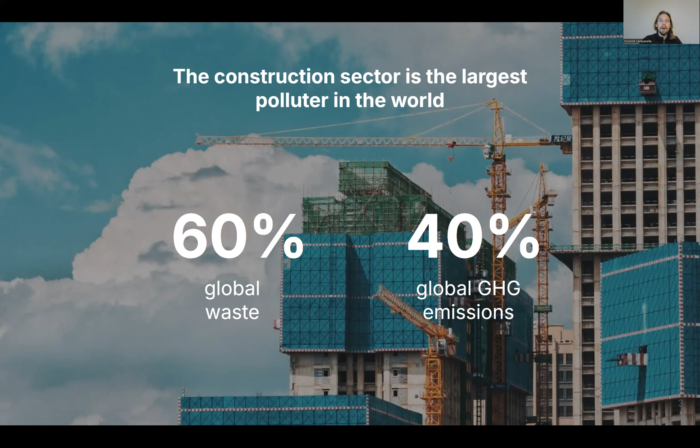Now, why is that so? The answer is quite easy also here, because we are following the so-called take, make, waste model. So we take valuable resources out of our earth, we produce them, we put them into buildings, and sometimes after just a couple of years, especially in the interior, we are taking these really valuable materials in a really good quality, and what are we doing with them? We are throwing them away.

A lot of them can be actually reused, but looking at it right now, only 1% of all materials are reused. So most of it is going into either landfilling or getting downcycled. And this is, of course, from an ecological standpoint, not really good. However, also from an economical standpoint, because we talk about really valuable materials, and we're taking these valuable materials and throwing them away. So there's a lot of economical value behind, which can be generated if we think in circles and not anymore in this linear model.

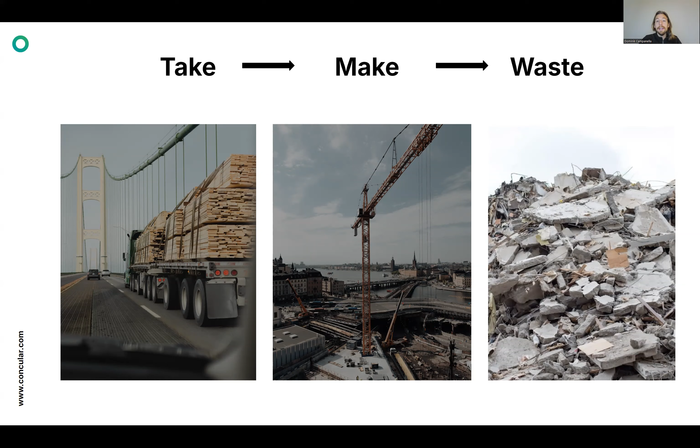So you can really say the climate crisis is decided on the construction side, and this is something more and more countries are realizing. So there are different measures they're doing. One measure I would like to introduce, it's not in Germany, but in other countries like Denmark and France, is so-called CO2 limits. These are really good because basically what these countries are saying is that you can still build whatever you want with whatever material you want.

However, you are only able to build if you are not above a certain threshold of CO2. In Denmark, it would be 12 kilos CO2 per square meter per year, and a building in Denmark would be used for 50 years on average. So you only get a building permission if in your planning you can show that you're below this limit. With wood it would be much easier to build than with concrete, but you can still build with concrete, you just have to think a bit more about the architecture.

Now, if you're reusing materials, these reused materials would count as 0 kilo CO2, because the savings of reusing materials is like 95 to almost 100% of CO2.

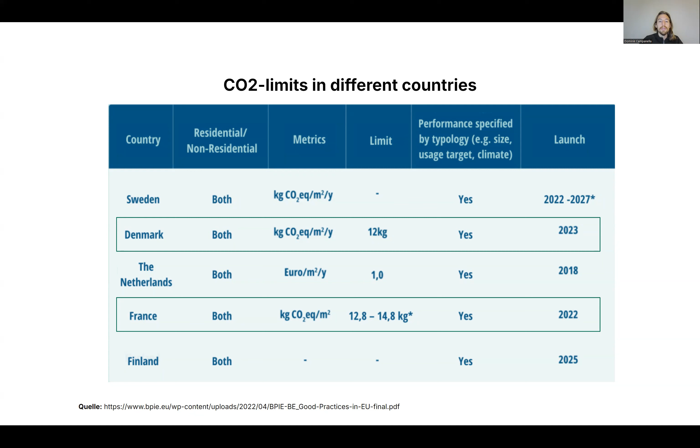Now, what they also did here is they start at 12 kilo, but every 2 years they decrease the CO2 limit. In 2023 they introduced it at 12, next year it should go to 10.5 kilo and so on. This is a really smart way because it's going down gradually, so the industry and everyone can adapt to it.

However, every year before they decrease the CO2 limit, they have a discussion, and this discussion was created this year. So as said, the plan was to decrease to 10.5, but what they did was calculate how much CO2 budget do we have to reach the 1.5 degree aim, the climate goal, and how many buildings do we want to build in that time.

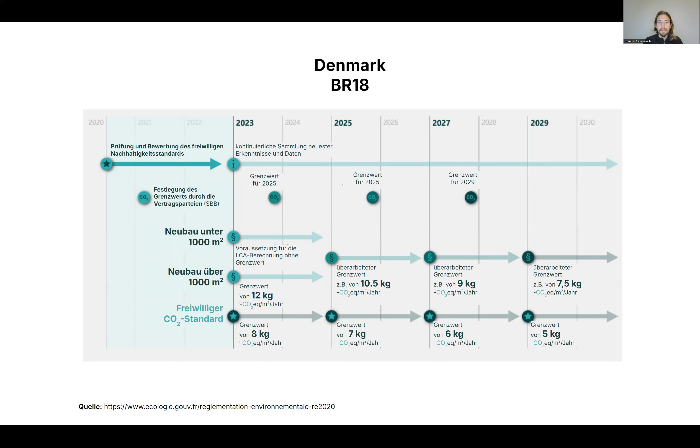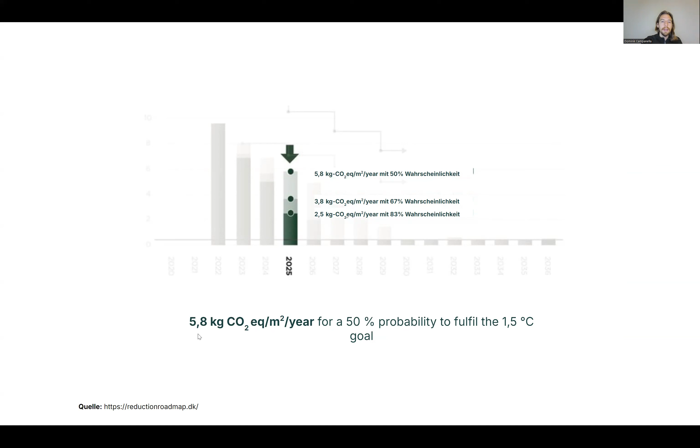And then they basically calculated the amount of CO2 which is still available, divided by the amount of square meters to build. And the conclusion was, if they want to reach with 50% probability - which is not even that high - the 1.5 degree goal, they'd have to reduce to 5.8. There was a lot of discussion, I mean, it's politics, and in the end it was agreed to lower the limit to 7.1 instead of 10.5.

This is already lower than what was intended for 2029, meaning this curve is much steeper, meaning it's much faster that you have to adapt to this new way of building CO2 reduced buildings.

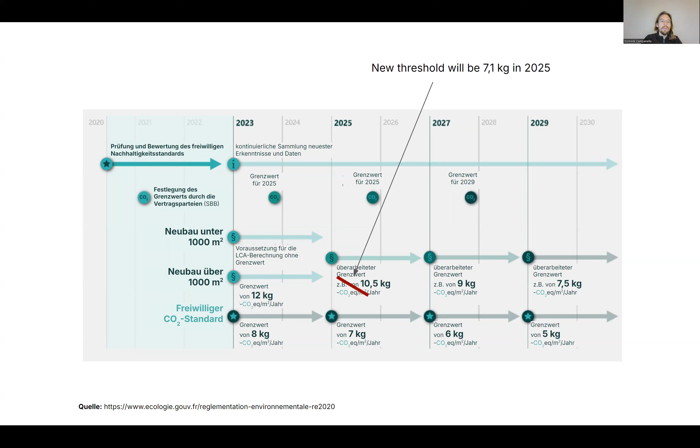It's also quite interesting why they're doing that. In Germany, this is not introduced right now, but there's a CO2 clock, meaning in 3 years all the CO2 budget is basically gone to reach the 1.5 degree aim. Germany already announced that they will also introduce that, so it's not a matter of if they want to introduce it, but when. And when they introduce it, it will be much steeper because we have far less time left.

I also asked the people in Denmark why they are doing these regulations, and they said it's quite easy: 40 years ago there was the same discussion about energy efficiency. What they did then was also have really good regulation, and the industry adapted to it. In that time, companies arose like Rockwool, Velux - these are really big manufacturers now of construction materials - and they were really successful in the market because they had the best products adapted to all the regulations.

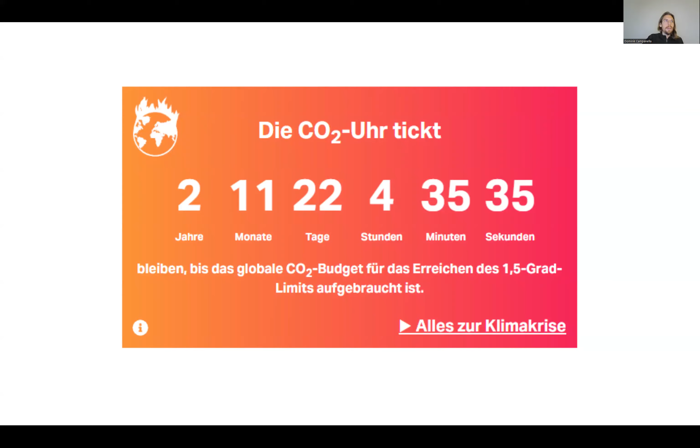Now Denmark is saying the same will happen with resource efficiency. This is why we put the regulation here now, so our industry can adapt to it, and our industry will export products all over the world. And this is right now happening. So sustainable construction, circular construction is a competitive advantage - it can create a whole new industry for a country, which is then thriving in terms of economic value. It's quite interesting because some countries see sustainability as a burden, while others see it as something good for the economy, because they will export all the materials. So this is something I think we should look at.

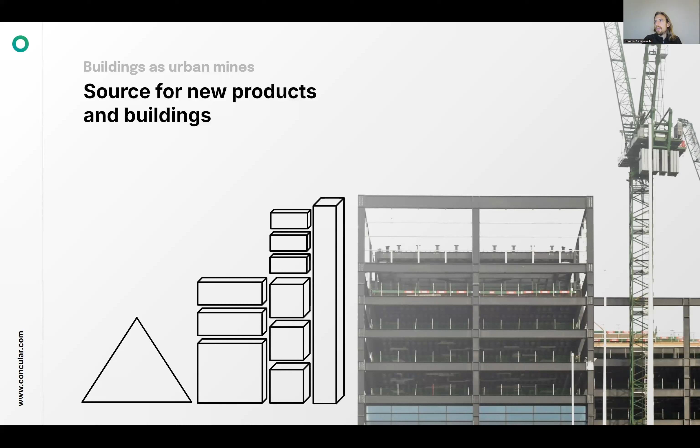So basically what we have to do, because reused materials is 0 kilo CO2, we have to look at buildings which are already there as mines, as a source for new products, as a source for new buildings. And we started already 12 years ago. One of our co-founders, Mark, he is an architect for more than 35 years.

He was on construction sites every day. On one site, they took out materials and landfilled them. On the other side, they took new materials, the same materials but new, and put them into buildings. He said this is nonsense, that on one side you trash materials and on the other side you use the same materials in a new way.

So that's why we created the marketplace, saying we have to connect the demand and supply of these materials, we have to match it. And this is what we created: Restado. It's now the largest marketplace in Europe.

What we discovered is that we can especially reach smaller businesses and private people. That's great, but if you look at where the big CO2 impact, the big economic and ecological effect is, it's the large construction projects, the professional actors. And they do not use Restado. Why?

So we asked them, why are you not reusing materials, why are you not using Restado? They said the answer was: because we need a certain amount of materials at a certain location, at a certain time, in a certain quality, with a warranty. And at a marketplace, like a classified ads marketplace, you cannot get this.

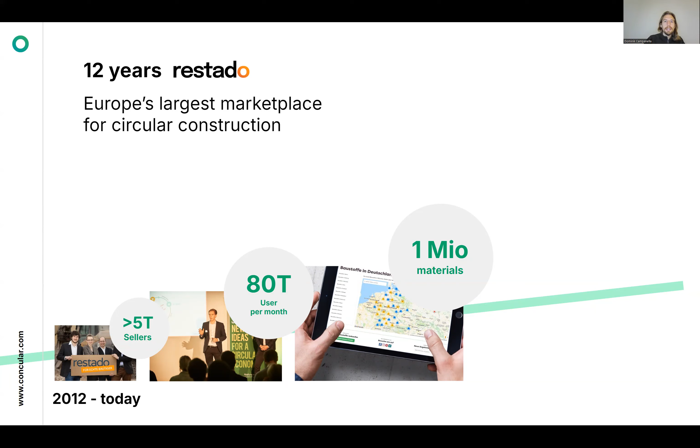So we wanted to make that possible, and we said okay, we have to make a new company that looks at all the process before and after matching these materials. This is why we created Concular, which is only for professional actors, only for large construction projects, and is able to fulfill all these requirements.

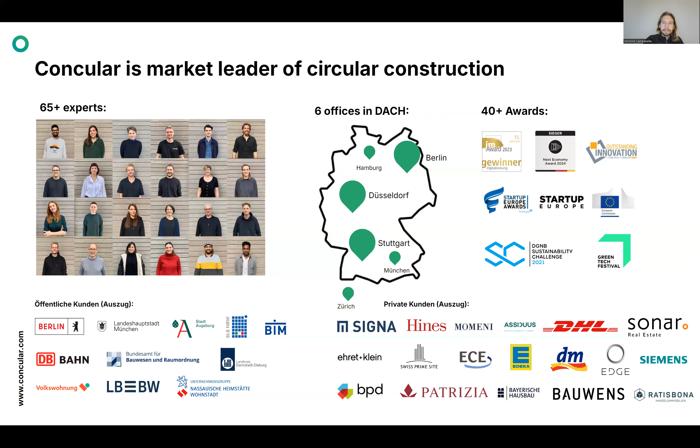We are right now around 65 people all around Germany, Austria, Switzerland. We work with large clients, public and private. We have a lot of partners, and we're trying to partner a lot with manufacturers, architecture offices, and so on.

We say it needs actually three steps: we have to digitize, we have to analyze, and we have to optimize.

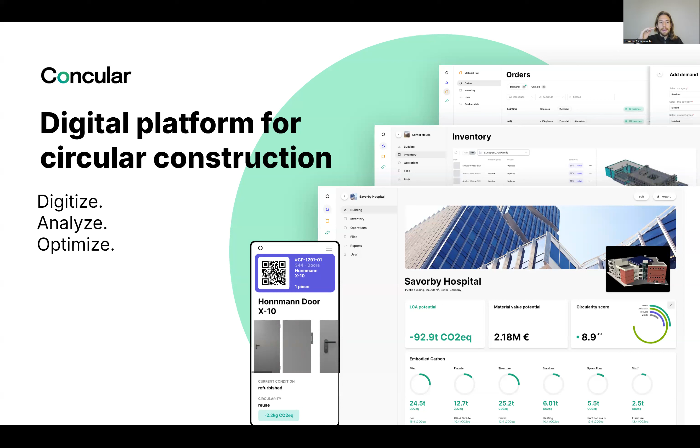With digitization, the big challenge right now for new buildings is that we don't even digitally document what's in a building. If you build a new building right now, in most cases after one year no one knows anymore what's in it. If you don't know what's in a building, you're not able to reuse the materials, because when deconstruction happens, the deconstruction company normally has just 2-3 weeks to get rid of everything. That's too little time to really reuse materials.

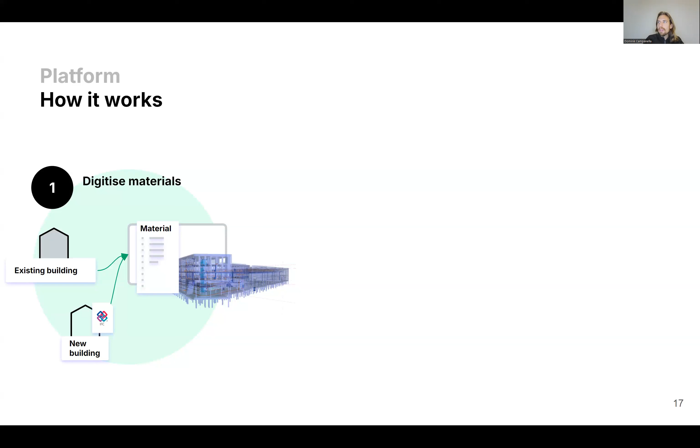So we have to digitize new and existing buildings so we know what's in them, and when we know what's in a building, we're able to reuse these materials. Then we're able to say how much CO2 is in a building, or what makes sense to reuse.

And then, when deconstruction happens, we're able to sell these materials back to manufacturers or into new buildings. Starting with new materials for new buildings, there's a concept called the building resource passport. Basically it's a passport for every building in which all the materials are digitized.

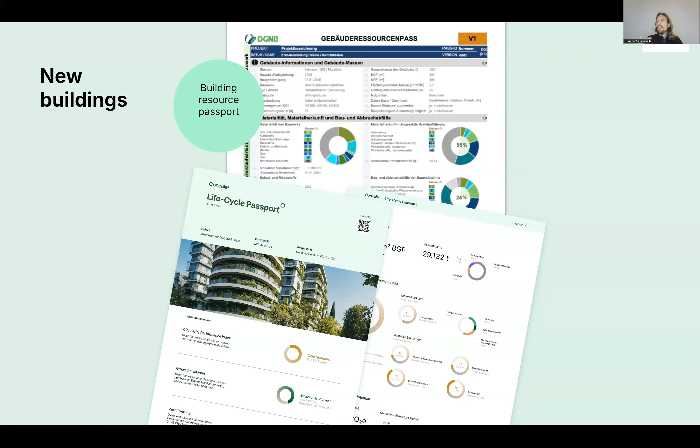We already have this in Germany through a certification system called DGNB, the German Sustainable Building Council, and also through the government, which will introduce it next year as required for every new building created in Germany. That will help the new buildings being built, but those buildings will only be deconstructed in 40 years or later, so it won't have a direct impact right now, but it's good for the future.

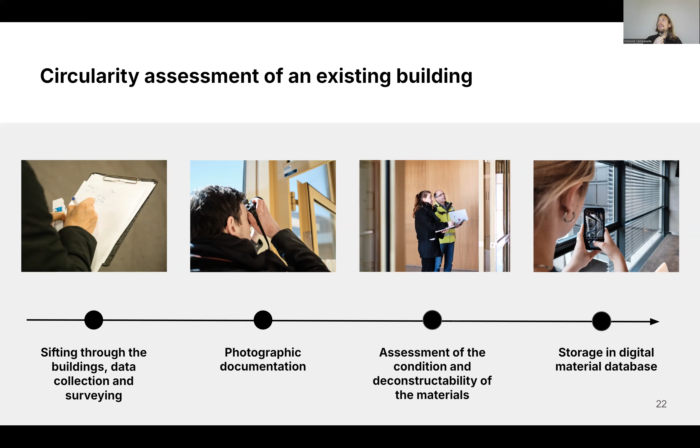So you go into a building with our software, and you can really easily and quickly capture all the materials on your phone.

You can install it on your phone, then you get all the materials digitally. You can also use something like a 3D scan sensor, which captures everything in a building or room in 1 or 2 minutes. Then you can use AI or computer vision algorithms that identify things like windows and doors. It's really fast.

This is great, and we did it for more than 450 buildings in Germany. But in the same time, 20,000 buildings were deconstructed. So we thought, okay, this is now a great technology, but we want every building in Germany that's getting deconstructed to look at what materials are in it and if we can reuse these materials.

The German market is very special because Germans love to follow rules. Rules are everything in Germany. What we discovered is if you build a building in Germany, you need a lot of permissions, sometimes 2-3 years to get them. It's an amazing system. But when you deconstruct a building, you don't need any permission at all. You can just tear it down.

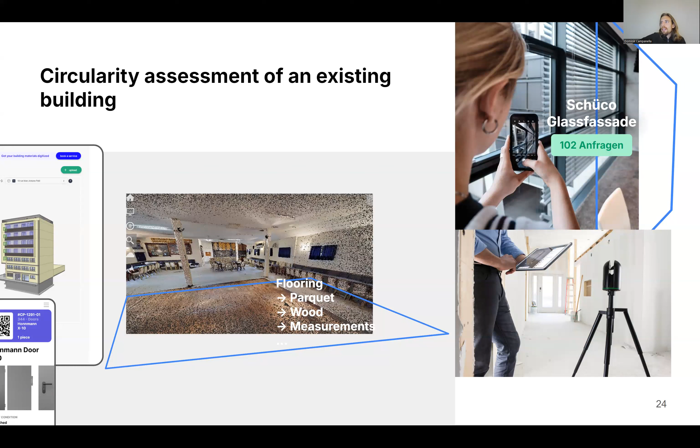This is amazing, that on one side we have this whole regulated market, and on the other side we don't have any regulation at all. So we thought, how can we make that now required? We thought, okay, if Germans really like regulation, then let's create our own regulation and create a standard. So this is what we did.

DIN is the standardization committee of Germany. So we created a DIN standard on how to do so-called pre-demolition audits - basically how to assess materials before deconstruction and how they can be reused. We did it with 30 leading companies in Germany, including all the big construction companies, universities, and so on. And we created this as a standard.

This is really amazing because we published that in September last year, in German and English. You can just search for DIN SPEC 91484, download it in English, and use it for yourself. It's free, everyone can use it - it's open source. And the interesting part is, because we introduced it in English, it was already adopted in Denmark, Switzerland, and France.

Meaning a German standard is not adopted in Germany, but it's adopted in other countries, which is quite funny. But what's also interesting is that now all public buildings in Germany are following the standard. We introduced it 1 year ago, and it's already applied to a lot of public buildings, and it will be getting required next year. Meaning we can have a really big impact if we combine the digital part with regulation and standards. It's a really big impact, and this is what we're doing more and more right now.

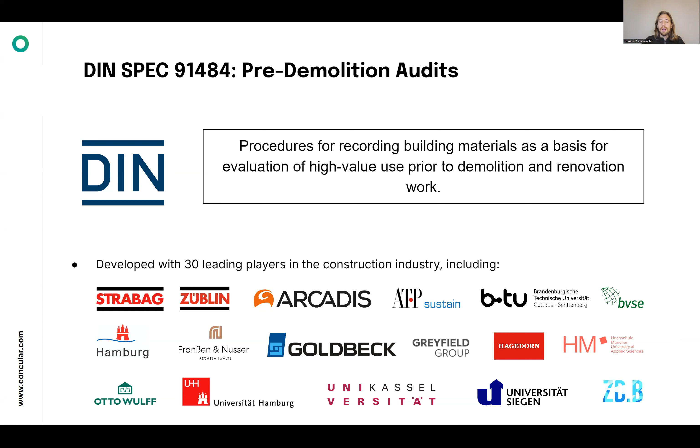We're creating now a new standard also for how a deconstruction concept could look. Now we have everything - let's say we went into a building, digitized everything, and then we can do a lot of interesting analysis. I'll give you one example.

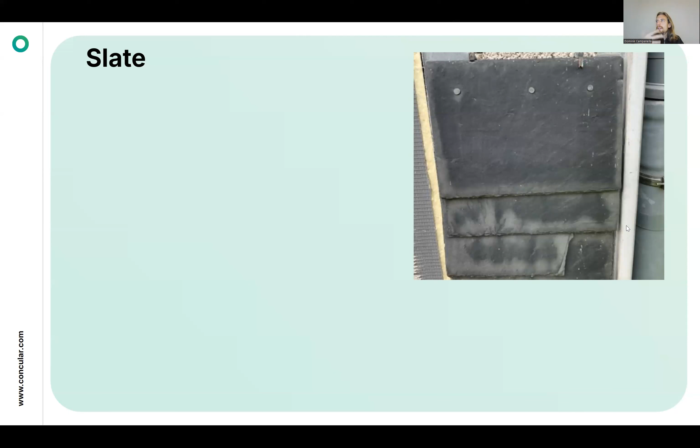We had one building in Germany, we digitized everything, and these are slates - we have 800 square meters of these slates. The idea is to tear down the building and build a new one, again with slates. So what we calculated is how much it costs to deconstruct these slates in Germany - almost 13,000 euros. And how much does it cost to buy new slates?

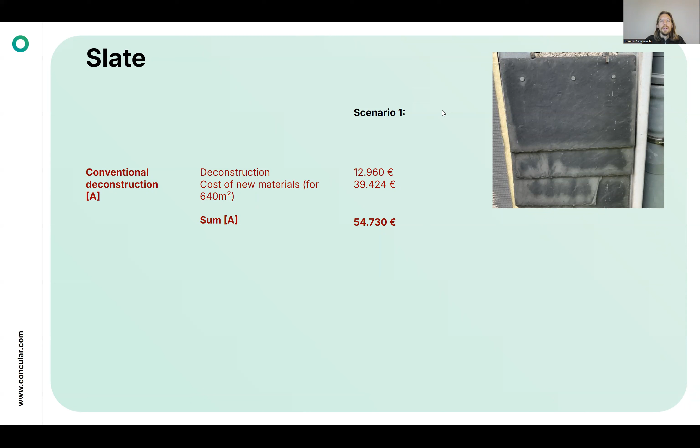We did not use 800 square meters because you can see there's some damage, so we said 640 square meters, around 80% of it. It costs almost 55,000 euros to get rid of it and buy new ones. Then we analyzed how much it would cost to take off these slates without destroying them - almost double the price - but also how much it costs to refurbish them and transport them.

And so in total, it's 21,000 euros. So it's 33,000 euros less if you reuse the materials than to get rid of them and buy new ones. Meaning, reusing in the same project, you can save a lot of money by reusing materials.

But you would save also a lot of money if you do that and then sell these materials, because if you buy new ones, you pay around 40,000 euros. Now you can sell maybe the reclaimed ones for around 30,000 euros, which makes again also a profit of still like 10,000 euros. Meaning like in every scenario, you would get money out of reusing these materials instead of having new materials.

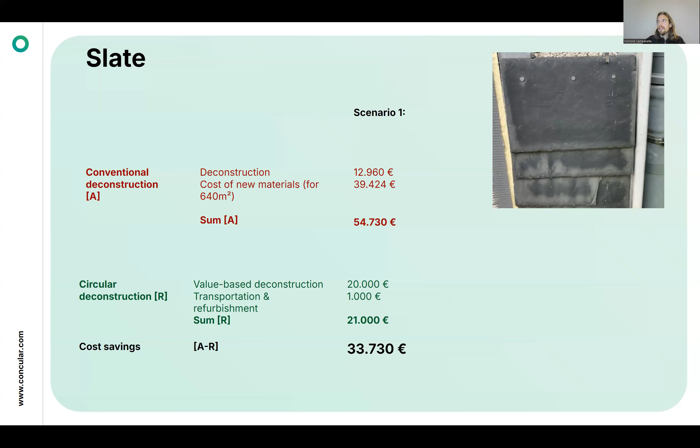Meaning like if you have a building, an existing building, it's much more worth because you can sell these materials. So it's really a lot of money in some buildings which you can make by selling the materials.

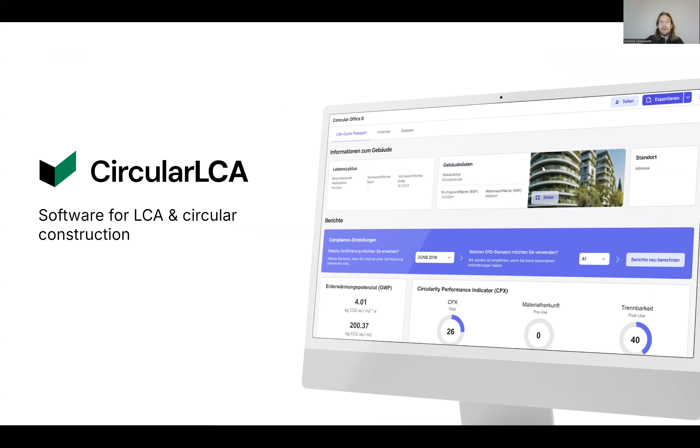And to enable that, we created a software called Circular LCA, where you can do like an LCA, so life cycle assessment, and you can measure all the stuff. So I just told you like you can make money with it.

And so what you can do with our software is you can actually calculate how much money can you make in selling these materials, because before you paid for the landfilling, now you can make money for selling them. So you can make out of the cost block a value block, and we can give you that number. And normally you can also use the number to sell your building for a higher price or put it on your balance sheet for a higher price.

You can also calculate how circular is your building. We calculated with 5 different factors. So like, where's the material coming from? Is it easily deconstructible? Is it easily separable? And then can it be reused or recycled?

And then you get a score between 0 and 100. And then it tells you how circular the building is. And you can do a lot of other stuff. Like you can even say what is the weight of my building? And which materials have the most CO2 and so on. So you can do a lot of analysis.

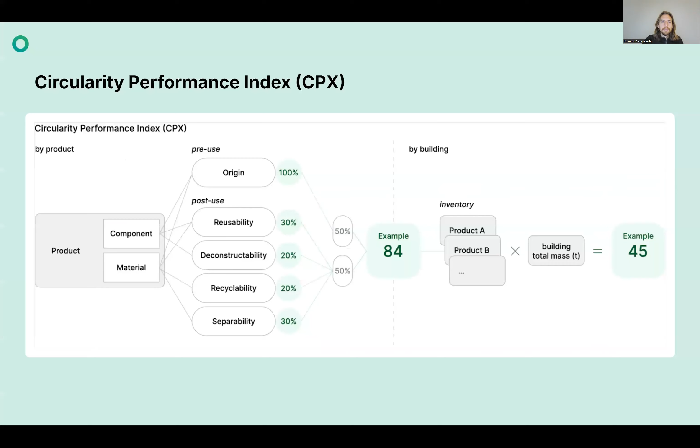And you can also do variant comparison. I think this is also quite interesting. For example, if you're building a new building, you can create different variants and say, like, in this one building, I put new materials, in the other building, I put reclaimed materials, and so on. And then you can compare it, how much CO2 it has, how much is my building worth, and so on.

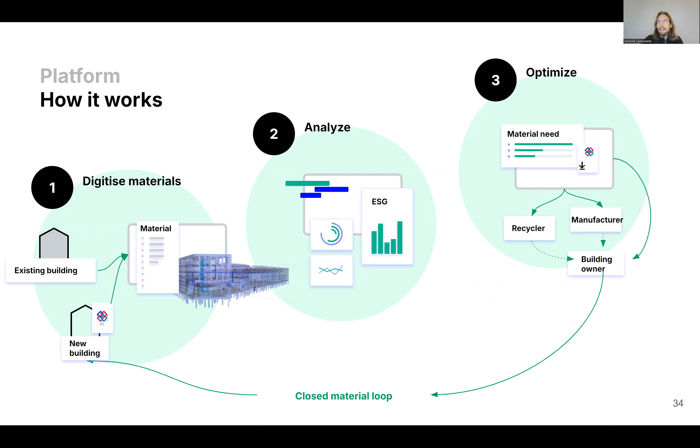Now, if you did all of that, this analysis, and then there's the deconstruction, you are able to reuse these materials.

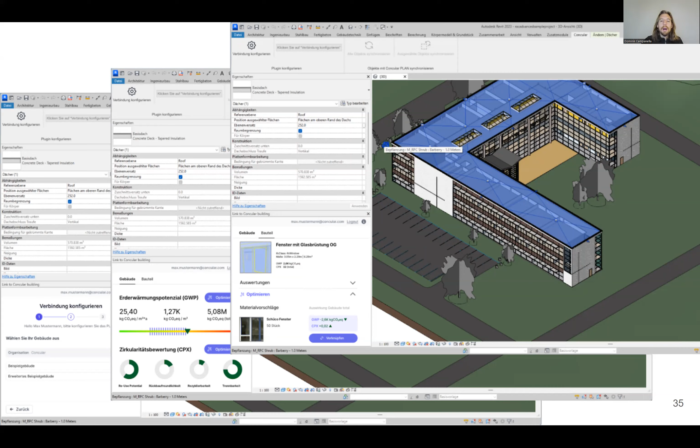I think this is very important to understand: we don't want to create a complete new process. We want to integrate into the existing process, because we realized it doesn't make sense to create complete new processes, since a lot of people have to adapt to it and it takes a lot of time, but we don't have any time anymore. So we have to kind of hijack the current process and put our software and everything in, to make it very fast.

Also, some materials we cannot reuse in Germany, for example windows. In Germany we have really strict regulation on energy efficiency and so on. So we also partner with initiatives like ReThink, a Swiss association. Basically what they do is take all these windows which are not getting reused in Germany and send them to Ukraine. Of course, we don't sell them to this association, we give it for free. They take it, they transport it, and then it goes into Ukraine. I think this is a really good thing, to support Ukraine with materials as much as possible, because there's a high scarcity as far as I understand.

Very important is also the infrastructure for reusing materials, because very often you have a deconstruction project, you get out the materials, but you don't have a new project, or the new project is starting maybe 2, 3, 4 months later. So you need storage facilities in between.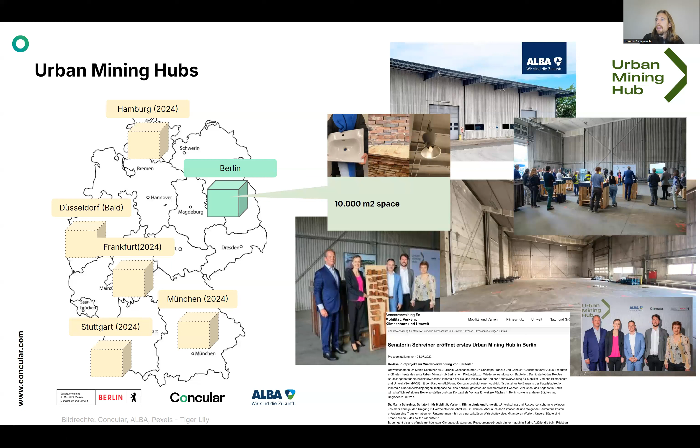This is why we created the concept of so-called urban mining hubs. Urban mining hubs are basically storage facilities where these materials can be stored, refurbished, and then put into the new building. We created our first urban mining hub last year in Berlin, thanks also to the city of Berlin and Alba, and it's really working well. Thousands of materials were already stored there, and every day there's trucks going in and out. We will open still this year a lot of these urban mining hubs in Germany. I think this is a really amazing thing.

Another really important part in Germany, and maybe it's the same in Ukraine, is about insurance. If people are buying reclaimed material, they often think it has a lower quality, and they think if something gets damaged they have a problem. This is why we created, with the largest insurance company in Germany, VHV Versicherung, an insurance specifically for reclaimed construction materials. So you can insure any damage on reclaimed construction material, meaning this is not something a new material has - this is only for reclaimed materials. In the end, a reclaimed material has an even better insurance coverage than a new material. So it's cheaper, it's faster to get, it has much less CO2, and it has a better insurance coverage, which is a lot of arguments to use reclaimed materials instead of new materials.

What's also quite interesting is, when we created this insurance with the insurance company, we had to assess the risk of damage for the materials. The insurance company showed us when a damage normally happens in such a material. Normally it happens in the first year after production, because there might be production issues, or in the last year of the insurance, because people discover they still have insurance and it will expire soon. So what we discovered is if you reuse a material, such as a brick, you don't have this issue of damage in the first year, because the brick was already in the building for 50, 60 years. There is no production issue anymore because it would have shown way before, meaning a reclaimed material has far less risk of getting damaged than a new material. So because people think reclaimed materials are lower quality, this is not true - they are even better quality than new material. This is what we discovered.

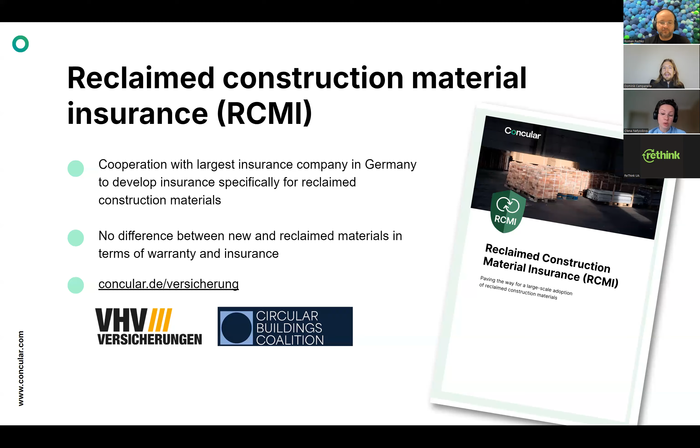With that, we already had more than 450 successful projects. And what I want is to show you now some of these projects. But I quickly have to drink something.

So starting with this is an industry hall in Berlin. In this industry hall, PV modules were created, so like photovoltaic. And that factory was closed down. And then we were told that we should sell the whole industry hall.

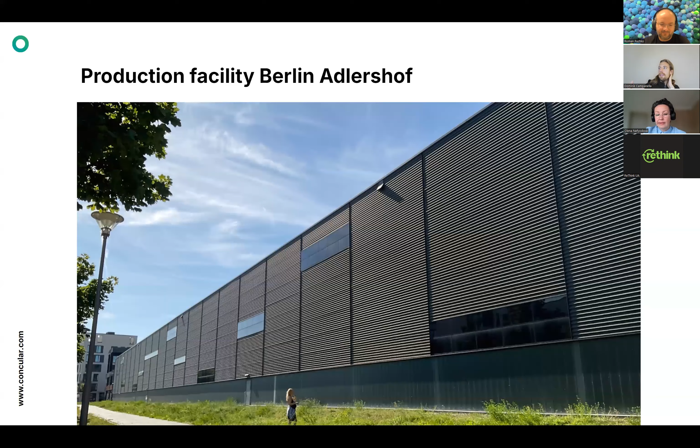Because they want to get rid of it, they wanted to build offices and so on. So what we did was, it's a 100 meter long hall, and we sold the whole hall as one part. So you can see how they right now deconstruct the whole industry hall. And this industry hall will be taken down and put in another place in Germany, the same.

So it's a one-to-one reuse of a complete building, which is amazing, because normally they would get rid of all the stuff and it would have been landfilled. Right now what they're doing is taking these really valuable materials and creating a new factory out of it. I think this is a really good example of reusing in the best way, reusing the complete building as it is.

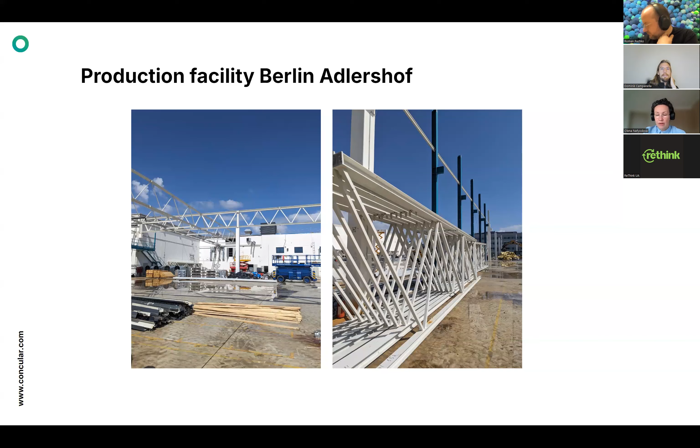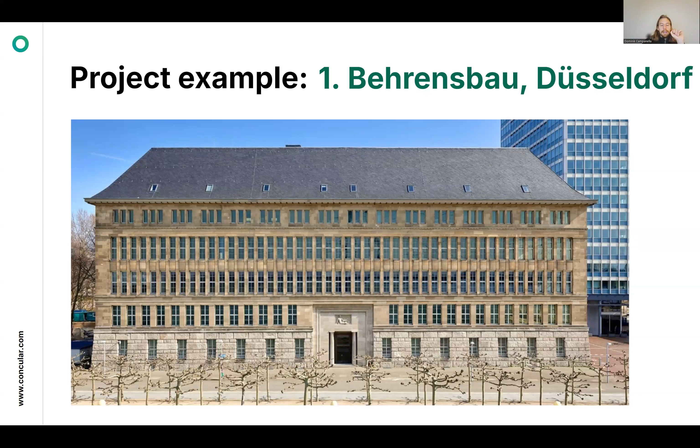Now, another building, it's in Düsseldorf. It's the former headquarters of Vodafone, a telecommunication company. It's a really beautiful building and it won't be torn down, but it's no longer the headquarters of Vodafone. They will strip out all the materials which are in the building and put in administrative offices for the government. Normally the idea would be to strip out really everything and get rid of it.

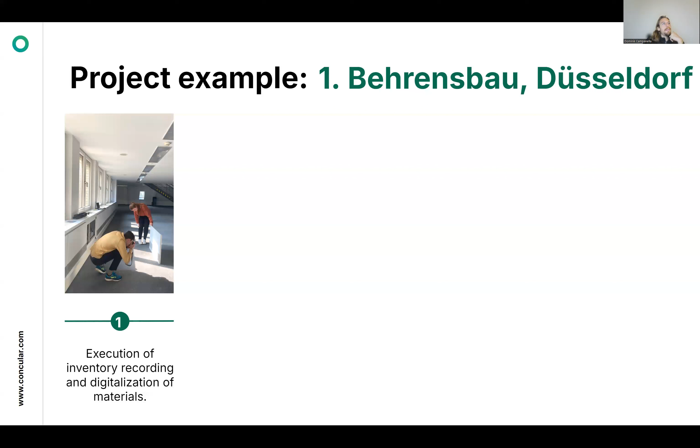What we did was we went into the building. It was around 20,000 square meters. We digitized everything in the building. And then we discovered a lot of really good materials, such as partition walls, kitchens, lightings, and so on.

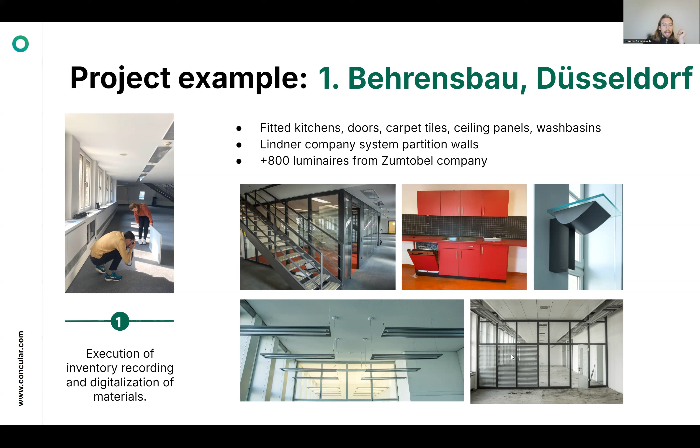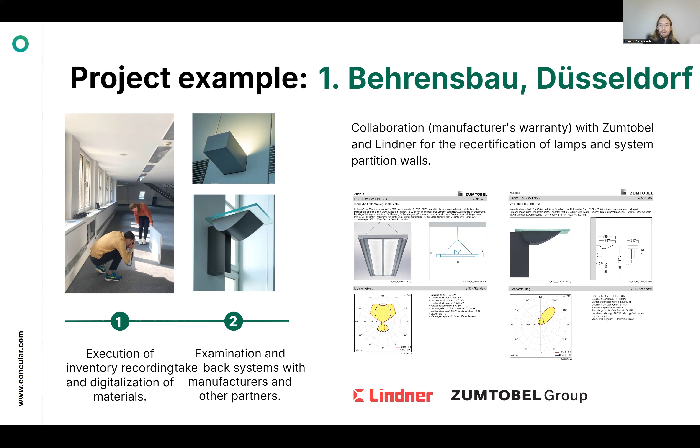Then what we did is we worked together with the manufacturers to create take-back systems and to get recertification of the materials. And then we sold these materials on our shop and so on. We sold a lot of these materials and then we took them out.

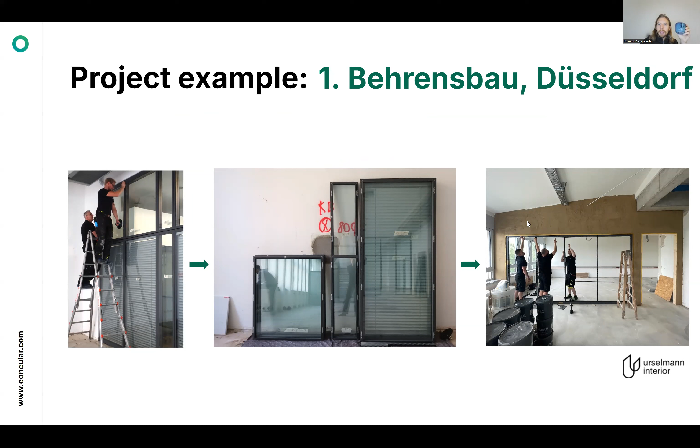So you can see, for example, how the partition walls are getting deconstructed here and how they're getting refurbished and put in. So here, this is in Düsseldorf, and this is in Münster, which is around 50 kilometers away from Düsseldorf. And so they put it in here again, the same partition walls. I think this is amazing.

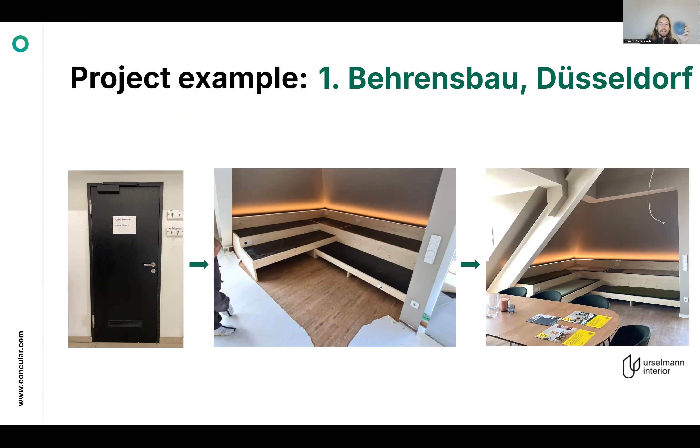The same with the kitchen. They took it out here, they put it in here. This is the door, the door they use now for seats. And I think the result is really good because we were able to recirculate around 70% of the material. Normally it's around 1%.

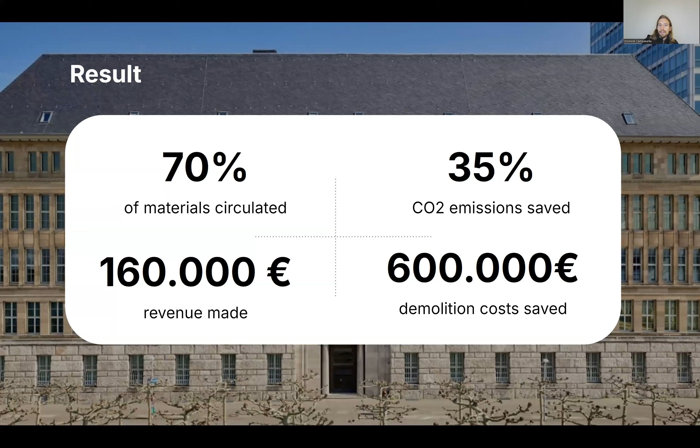We are at 70% here. We saved more than 35% of CO2 emissions. And I think this is the most interesting part: we made 160,000 euros in revenue and saved 600,000 euros in demolition cost. So it's almost more than 750,000 euros, and this is now part of the public hand, so it's tax money. We saved 750,000 euros of tax money, which is good for the whole society in Germany because we are not landfilling the materials, but selling them.

So the idea of the project developer was to strip out everything and put in new stuff. But what would happen is you would take these really modular partition walls, which are built in a modular way, take them out, trash them, and put in again modular partition walls, which doesn't make any sense because you can reuse them.

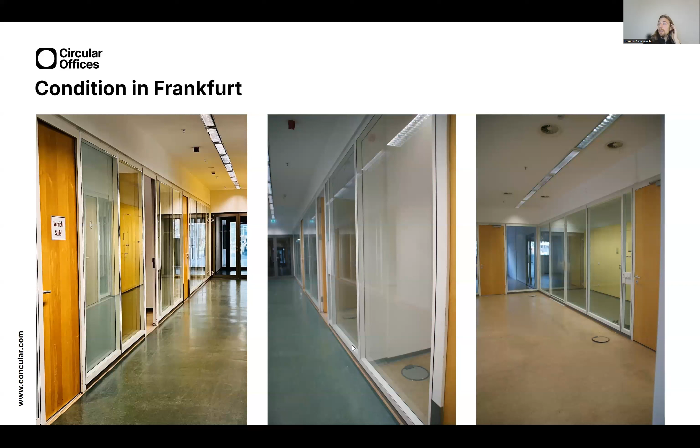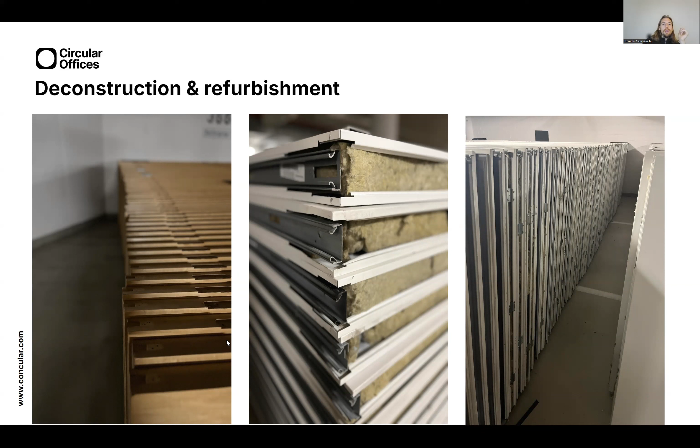So we talked with the project developer and they were very open for it. And what we did was take these partition walls, put them down to the basement of the building. There we put a production facility, like a refurbishment facility, and we refurbished all these partition walls, and then we put them in again.

So you can see how they are stored here and how they were refurbished. And then we put it in. It's the same, so these old school partition walls you see here are the same as these.

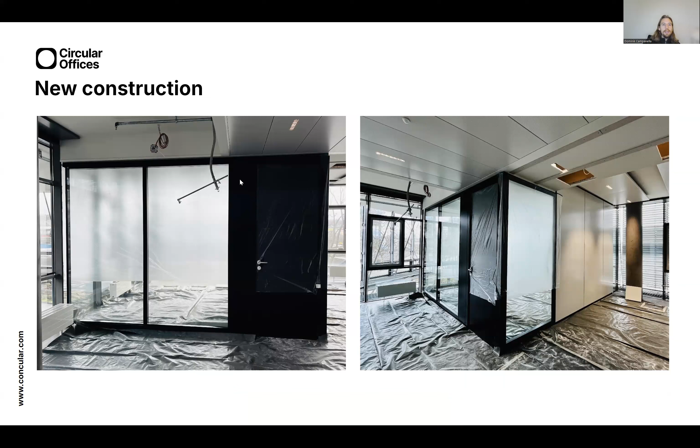They were just painted in a new way, and they look like new. It's really, really good quality. And here you can see how it looks like when it was in the building. It's a perfect office now.

Everything was rented out, and they saved huge amounts of money, hundreds of thousands of euros, because they just did not buy new. I mean, 1 meter is not a lot, but 1 meter costs around 500 euros in Germany, and they had 500 meters. So it's a lot of money they invested and saved here.

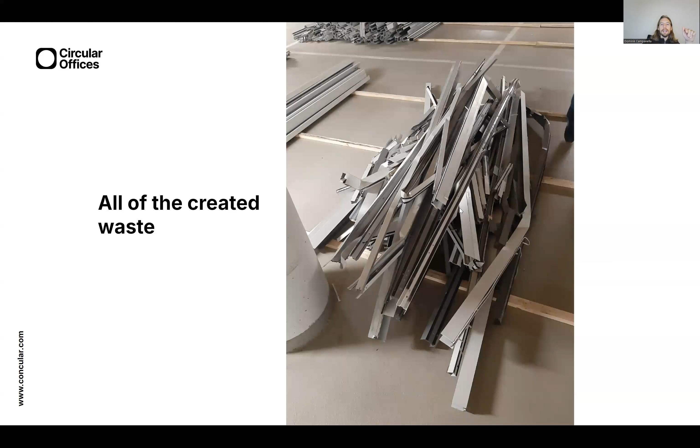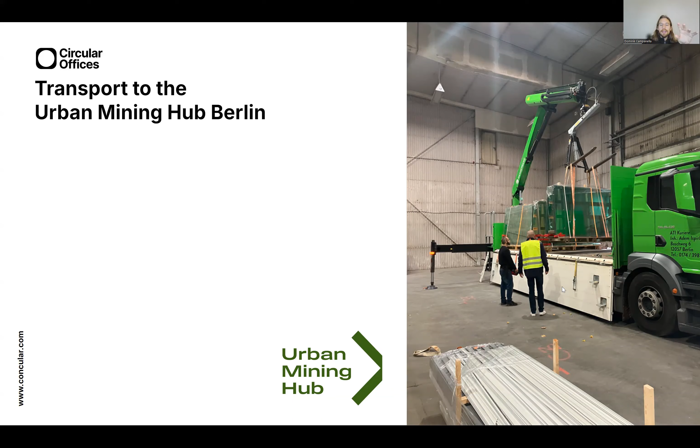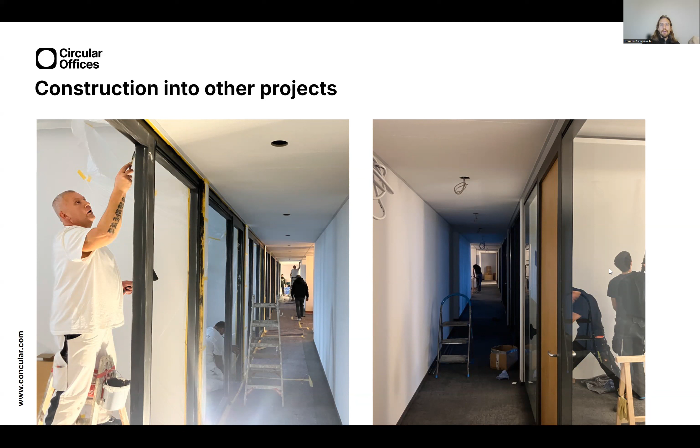You see here they now have much more of an open space concept. They didn't use all of the partition walls anymore. So the rest, which was not used in this project, was transported to our Urban Mining Hub, as explained before. And what we did was put it into other projects all over Berlin. Here you can see how the same partition walls are now in another project in Berlin, how they're getting painted before the finishing, and here how they're put in, and all the clients are really happy.

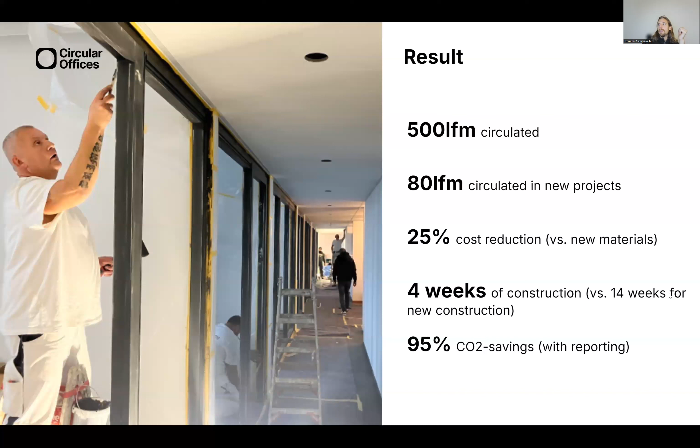We saved around 95% of the CO2 and 25% of the cost. Reclaimed materials are cheaper than new materials, and they're much more available. So it only took 4 weeks versus 14 weeks, which is also really good. And of course, we did an LCA, so we know how many tons of CO2 and materials we saved. This is, of course, also very important.

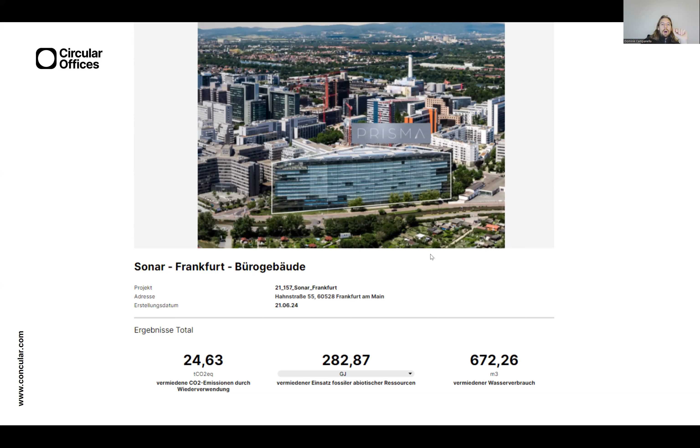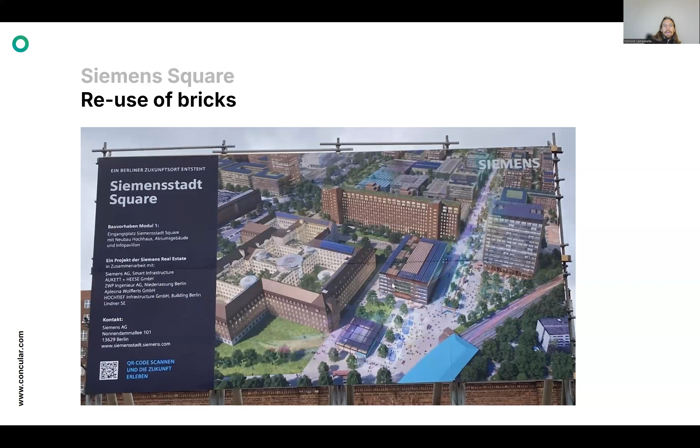Now, we not only do interior — the examples so far were a lot of interior — but also proper materials such as bricks. Bricks is something I really like. We have here in Berlin a development called Siemensstadt Square, where there are a lot of brick buildings getting deconstructed, and what we do is take out these bricks.

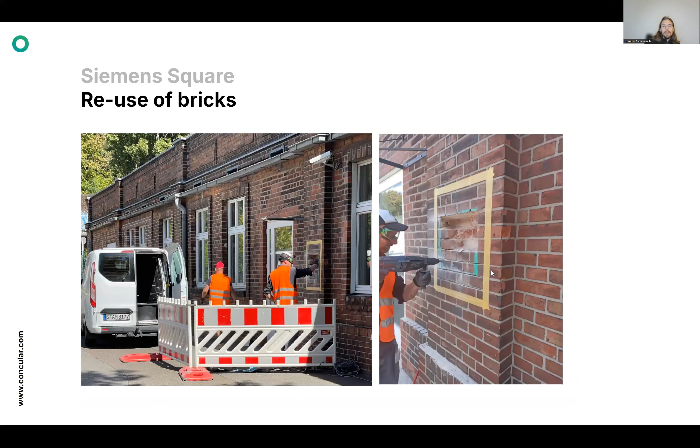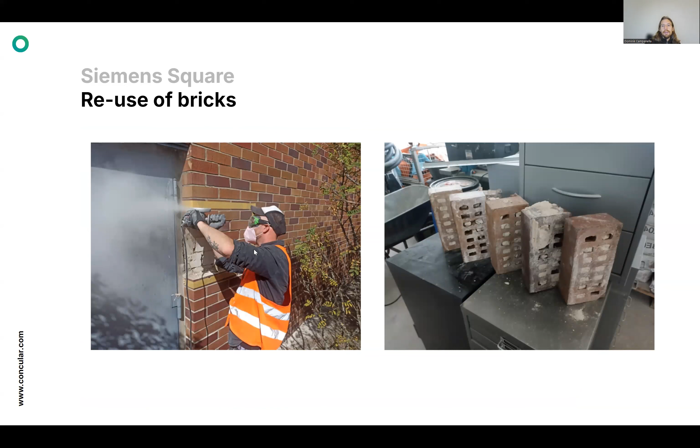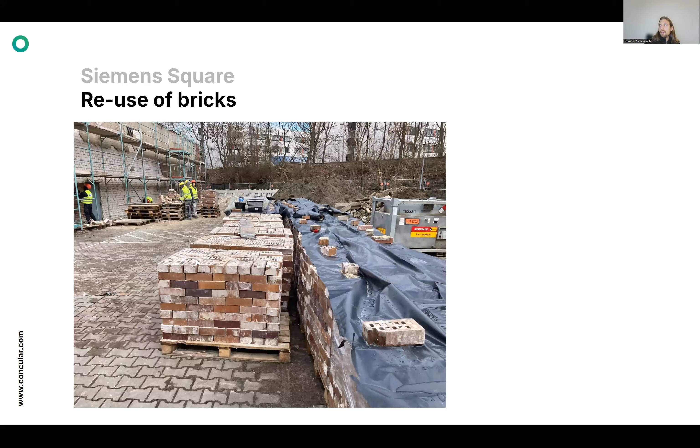You can see it here. These are full bricks, and then we have bricks with holes, and you can see how they're getting taken out here. Then they're getting tested, and if they fulfill all the tests — and the testing is not really expensive — they're getting taken out of the buildings, put on pallets, and then reused and resold. We're selling around 2 million bricks per year, meaning we are one of the largest brick sellers in Germany.

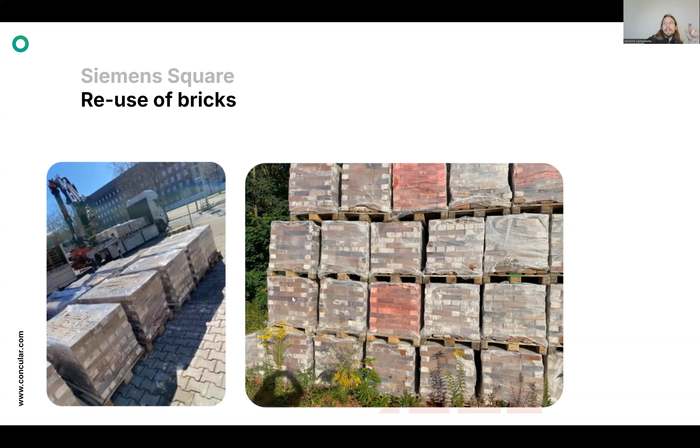We don't sell new bricks, and with that we're the largest seller of reclaimed bricks in Germany, maybe in Europe. It's an amazing concept — bricks are made for 200, 300 years. They're not easily damaged; it's basically stone. So if you put it in the building in a good way, you can reuse it many times. We can do all the tests, and this is very important, because in Germany you have to apply some certification.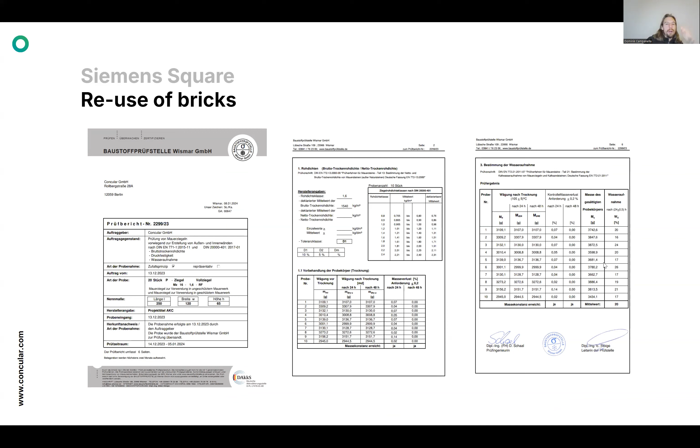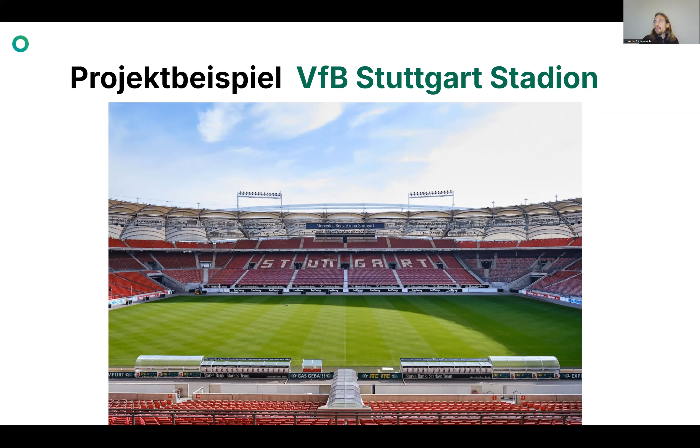So we sold some of them to cinemas and others who could use them. But we thought that in German society, there's not a lot of awareness about the problem in the construction sector, and that reuse is something good. So we used that to do a lot of awareness building around circular construction. We went to the press — TV and a lot of the press in Germany — and said, you are able to buy one part of your stadium.

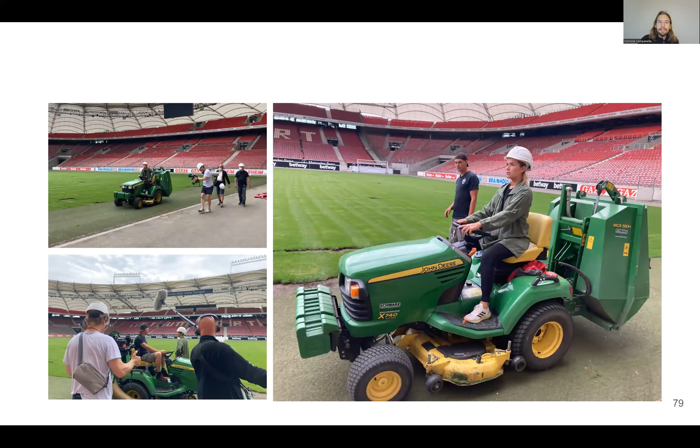And then we had a public website where they could buy these chairs. We even did TV spots on that. And then basically we deconstructed the chairs—you can see one of these premium chairs was deconstructed, and we sold one chair for 20 euros.

It was quite interesting because we sold all 4,000 chairs—there was a huge run on them. People came saying they'd had a ticket for the stadium for this one specific seat for the last 10 years, and they wanted that specific seat. This is how this picture was created, because people went in and searched for their seat, which they'd sat in for the last 10 years, and they took it.

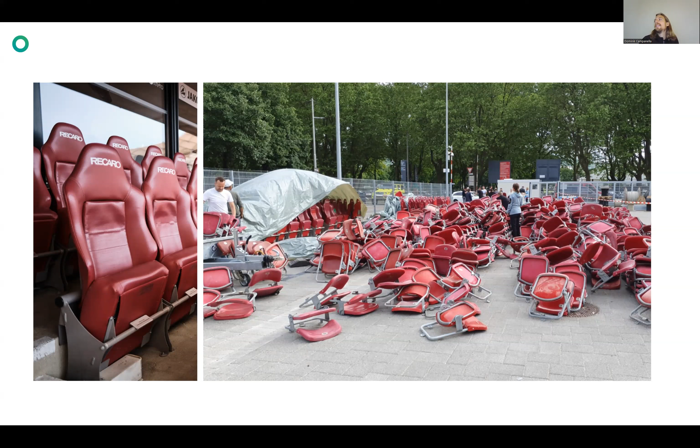Now in Germany, 4,000 homes have these red seats. I don't know who puts these in his apartment, but it's a nice story, because every time they see the seat they have emotional value attached to this building or material. This is what we have to create—emotional value for materials—and with that we can increase their value. Before you had to pay 5 euros to get rid of the seat, now you get 20 euros because someone really likes it. So you can really create value by putting emotional meaning into it.

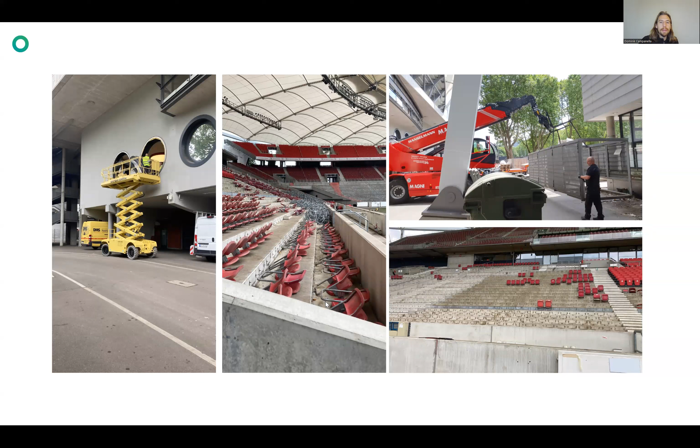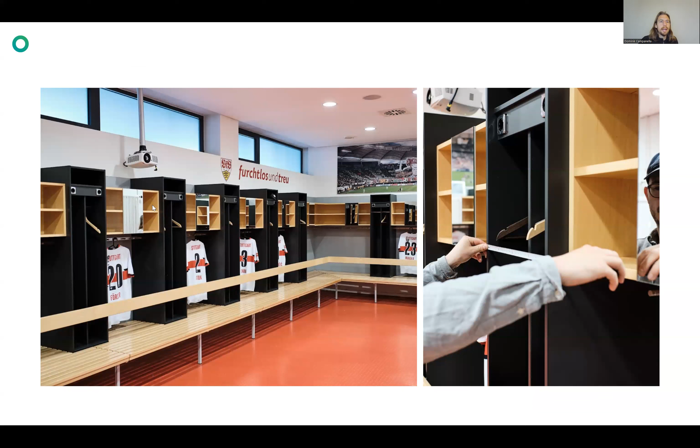You can see also how they were deconstructed here. We sold much more stuff too, like the windows—they were getting rid of them. And from the football team, the whole furniture and so on was also deconstructed.

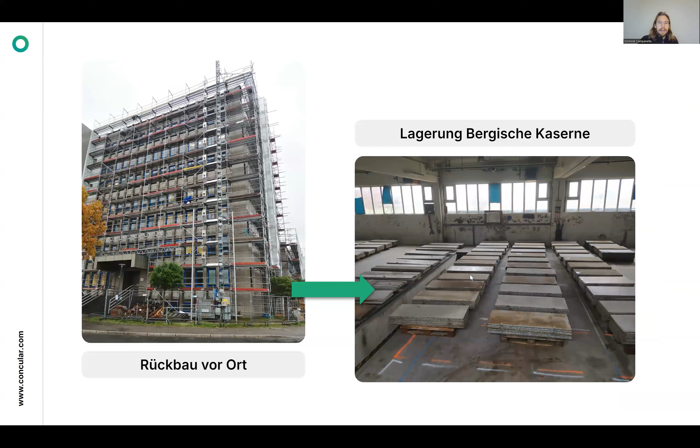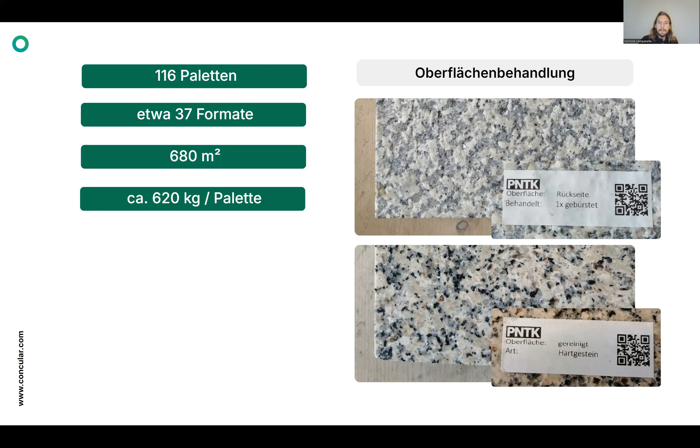Another example is facade materials. This is a facade in Germany, a public building, and we took off the facade—it's granite stone. We did different tests on how to clean the surface of the stone facade. Of course you can reuse it, but you can see here they are really thick, so you can cut them in two and reuse the double amount.

Or we work together with a manufacturer and put some cork on the bottom. This is really good because if you put cork on the bottom, you can put it on the floor without gluing it. So this stone or granite can be used as flooring without gluing it down. That means in 20 years, when you don't need this floor anymore, you can just take it out and put it somewhere else. It can be reused for a long time because it's stone.

You can use the stone for 200, 300, 400 years. But if you glue the stone, it gets damaged when you take it out and you can't reuse it anymore. This is a really good example of how you take a valuable material and transform it into a circular material which can be reused many times.

So these are just a couple of examples of the more than 450 projects we did. I hope I could give you some impression of what is already possible. And of course, we are not at the end—we are just at the beginning.

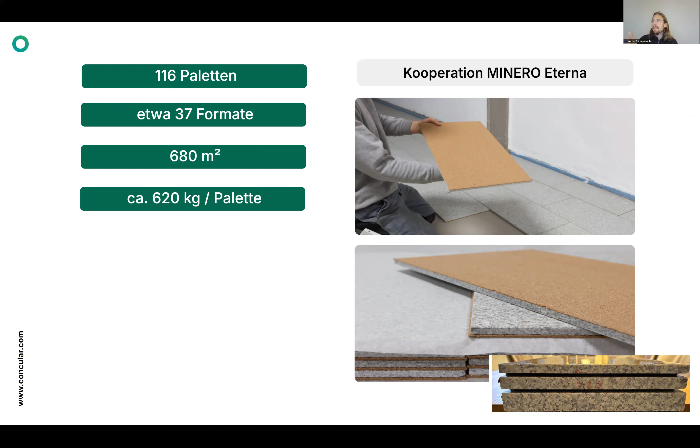For us, for Concular, our aim is that you cannot choose between construction and circular construction anymore—construction is by definition circular. This is what we want to reach, and what we want to do together. This is why our model is: together we are circular.

Thanks a lot again for the invitation, and I hope I could give you some insights. Thank you. Wow, thank you, Dominik—it's been fascinating, I guess. Gesundheit. Yeah, thank you, I'm still a bit sick, but yeah. Thank you especially for joining today. It's a fascinating story—I myself have so many questions that I don't think we'll have enough time to discuss them.